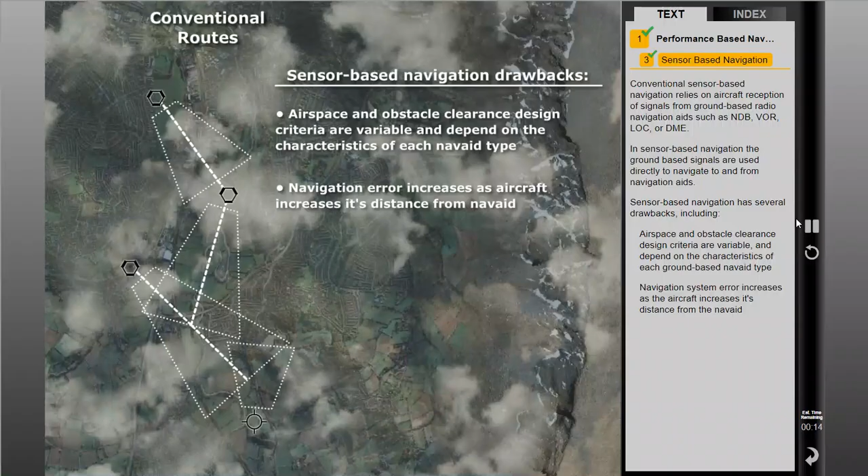Sensor-based navigation has several drawbacks, including: airspace and obstacle clearance design criteria are variable and depend on the characteristics of each ground-based nav aid type. Navigation system error increases as the aircraft increases its distance from the nav aid. And routes and approach tracks are restricted to straight-line designs and are constrained by large obstacle clearance allowances and the physical siting of the navigation aid or aids.

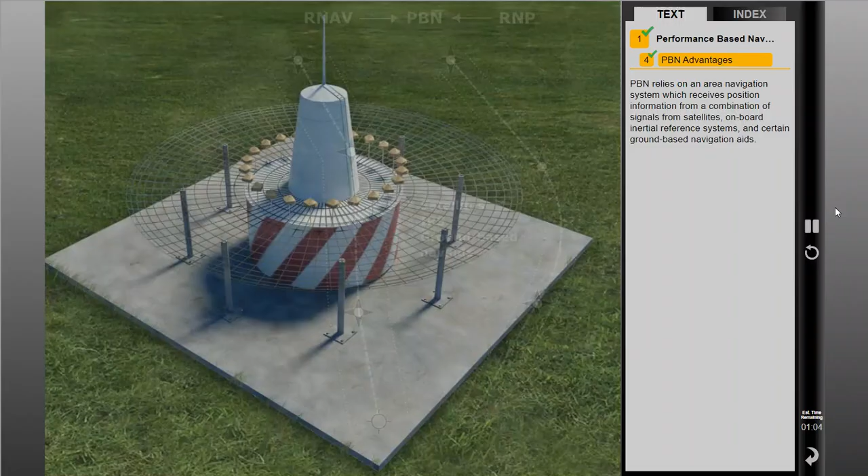PBN relies on an area navigation system, which receives position information from a combination of signals from satellites, onboard inertial reference systems, and certain ground-based navigation aids. In PBN, ground-based signals are not used for direct navigation purposes. Rather, they provide additional position information.

PBN has several advantages over conventional sensor-based navigation, including: airspace and obstacle clearance design criteria are made more consistent and independent of different or changing navigation technologies. Navigation system error is linear and does not change according to distance from a waypoint. Routes and approach tracks can include turning designs and are less constrained by obstacles due to smaller clearance allowances.

Navigation route design no longer needs to consider nav aid siting issues. And finally, the navigation function is performed by highly accurate and sophisticated onboard equipment, allowing a reduction in cockpit workload and an increase in safety.

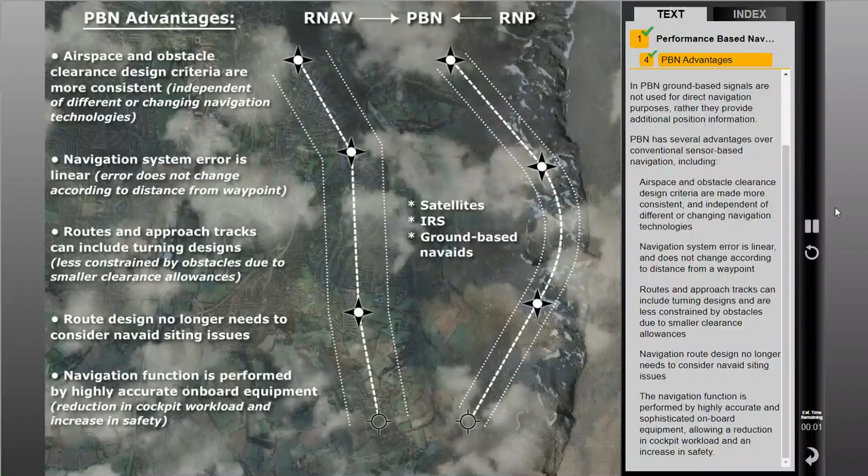The PBN concept relies on the use of an RNAV system. Two core inputs are required for the application of PBN: the nav aid infrastructure and the navigation specification. Applying these components in the context of routes and instrument procedures results in a third component: the navigation application. This topic will discuss the role of each of these components in the concept of PBN.

The concept of nav aid infrastructure refers to ground or space-based navigation aids. Ground-based navigation aids include NDB, VOR, and DME. Space-based nav aids include GNSS elements. As mentioned previously, PBN uses the two types of nav aids together for position fixing and navigation.

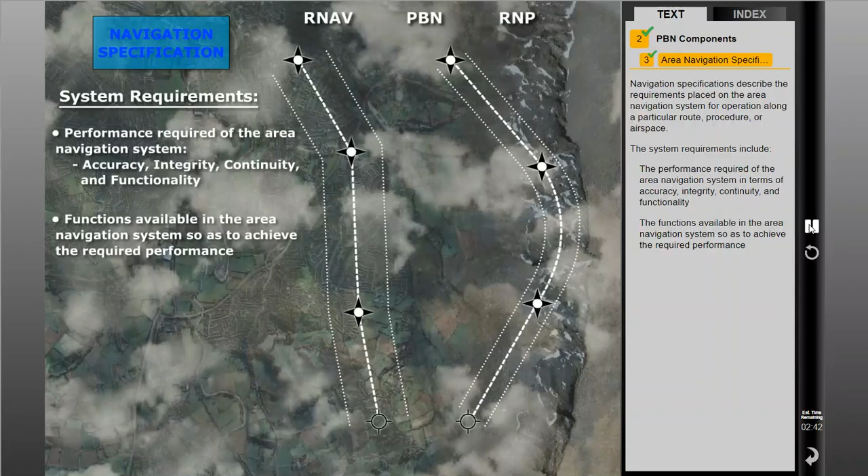Navigation specifications describe the requirements placed on the area navigation system for operation along a particular route, procedure, or airspace. The system requirements include the performance required of the area navigation system in terms of accuracy, integrity, continuity, and functionality, the functions available in the area navigation system so as to achieve the required performance, the navigation sensors integrated into the area navigation system that may be used to achieve the required performance, and flight crew and other procedures needed to achieve the performance mentioned of each navigation specification.

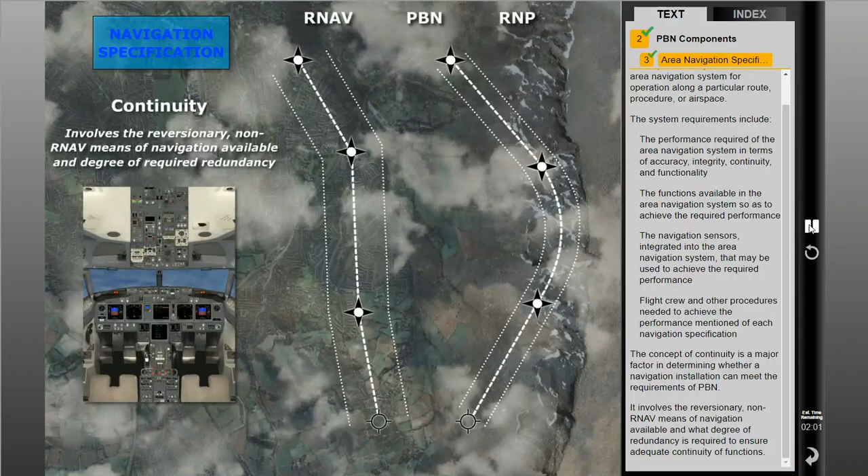The concept of continuity is a major factor in determining whether a navigation installation can meet the requirements of PBN. It involves the reversionary, non-RNAV means of navigation available, and what degree of redundancy is required to ensure adequate continuity of functions. Each navigation specification requires a level of continuity to be demonstrated by the navigation equipment prior to operation in RNAV RNP airspace routes.

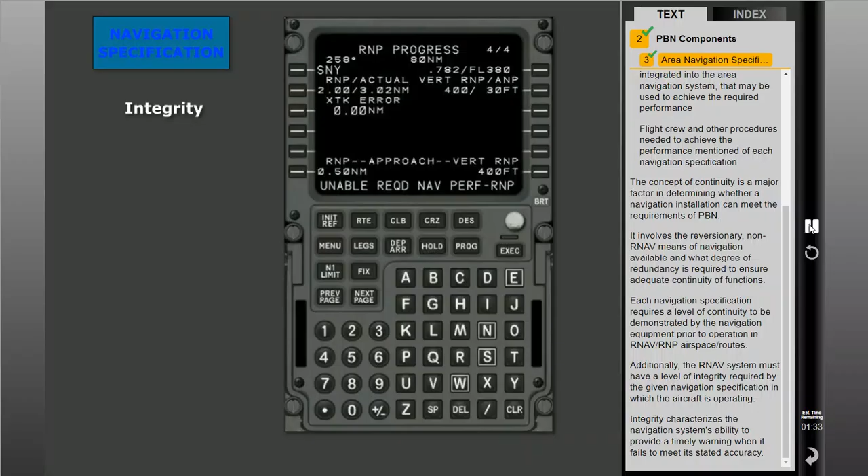Additionally, the RNAV system must have a level of integrity required by the given navigation specification in which the aircraft is operating. Integrity characterizes the navigation system's ability to provide a timely warning when it fails to meet its stated accuracy. The safety of the operation is also contingent upon the accuracy, resolution, and integrity of the data being used. The processes applied during data origination will ensure the accuracy of the data.

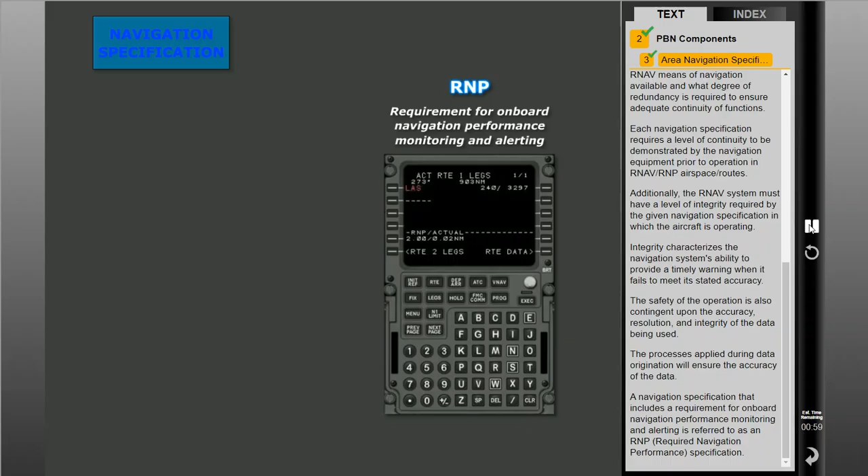A navigation specification that includes a requirement for onboard navigation performance monitoring and alerting is referred to as an RNP, or Required Navigation Performance Specification. A navigation specification that does not include a requirement for onboard navigation performance monitoring and alerting is referred to as an RNAV, or Area Navigation Specification.

For any particular PBN operation, it is possible that a sequence of RNAV and RNP applications is used. Be aware that compliance with one specification does not automatically imply compliance with another. More importantly, being compliant with a more stringent specification does not automatically imply compliance with a less stringent specification. Each RNAV and RNP specification will be discussed in detail later in the lesson.

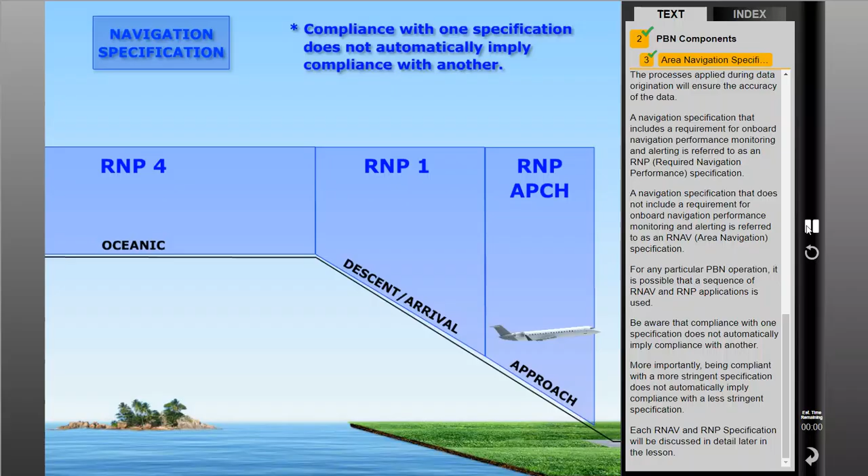The navigation application refers to utilizing the appropriate infrastructure and the specification required for the operation. Examples of how the navigation specification and the NavAid infrastructure may be used together in a navigation application include RNAV or RNP SIDs and STARs, RNAV or RNP ATS routes, and RNP approach procedures.

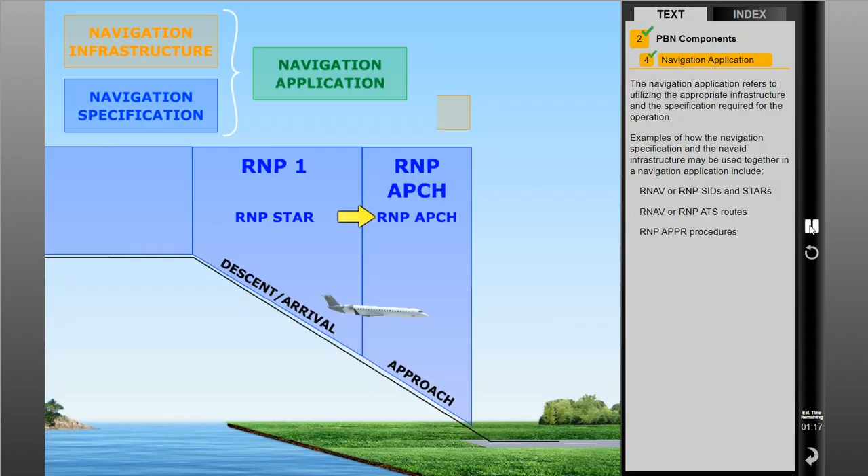RNAV systems range from single sensor-based systems to systems with multiple types of navigation sensors. The RNAV system typically integrates information from sensors such as air data, inertial reference, radio navigation, and satellite navigation, together with inputs from internal databases as well as crew-entered information.

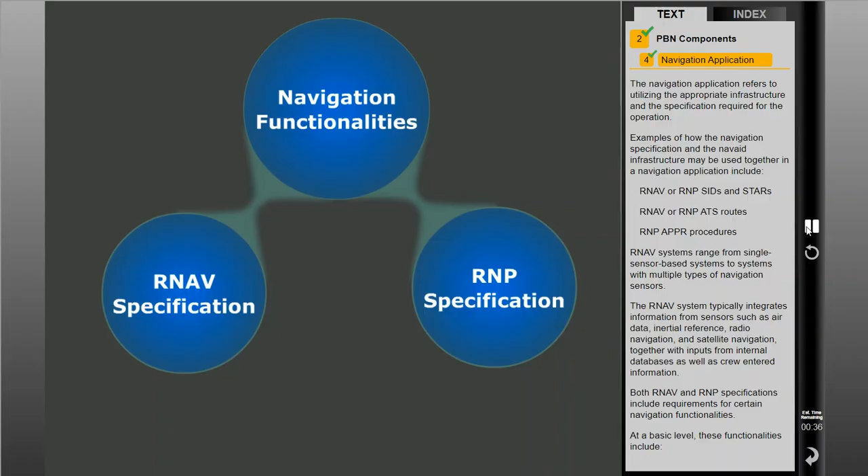Both RNAV and RNP specifications include requirements for certain navigation functionalities. At a basic level, these functionalities include continuous indication of aircraft position relative to track, to be displayed to the pilot flying on a navigation display situated in his or her primary field of view,

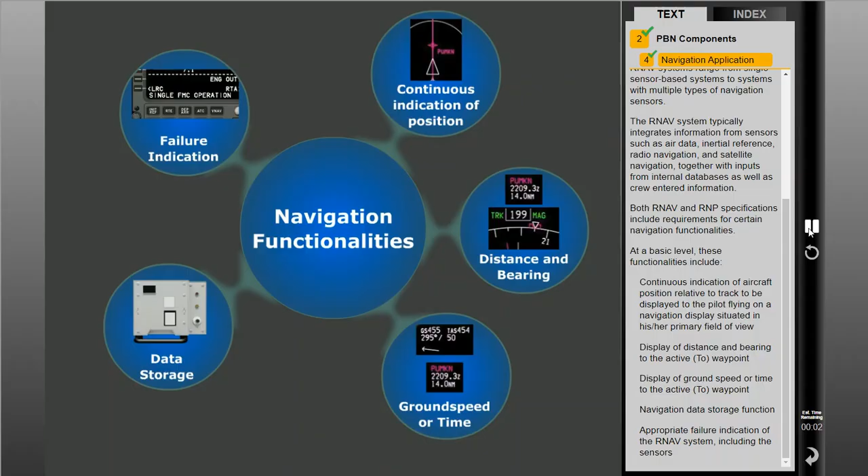display of distance and bearing to the active waypoint, display of ground speed or time to the active waypoint, navigation data storage function, and appropriate failure indication of the RNAV system, including the sensors. An RNP system is an RNAV system whose functionalities support onboard performance monitoring and alerting.

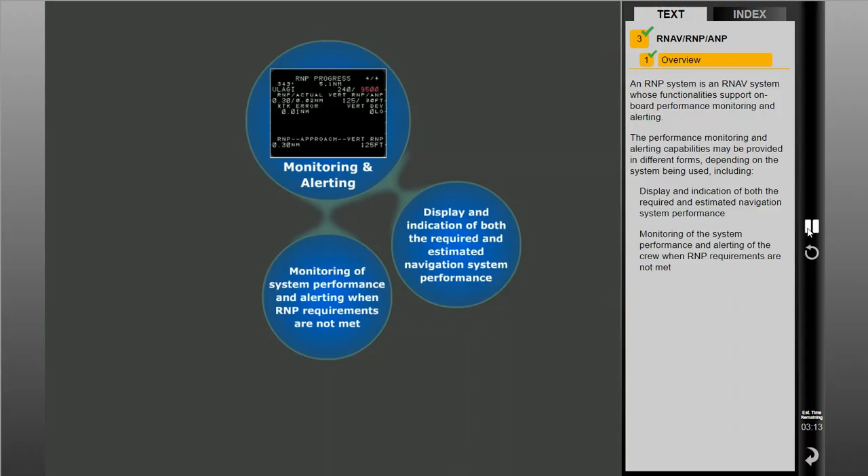The performance monitoring and alerting capabilities may be provided in different forms depending on the system being used, including display and indication of both the required and estimated navigation system performance, monitoring of the system performance and alerting of the crew when RNP requirements are not met, and cross-track deviation displays scaled to RNP in conjunction with separate monitoring and alerting for navigation integrity.

The airworthiness approval process assures that each item of the required area navigation equipment installed is of a type and design appropriate to the operation. Additionally, operators need to ensure the required installations will function properly under foreseeable operating conditions.

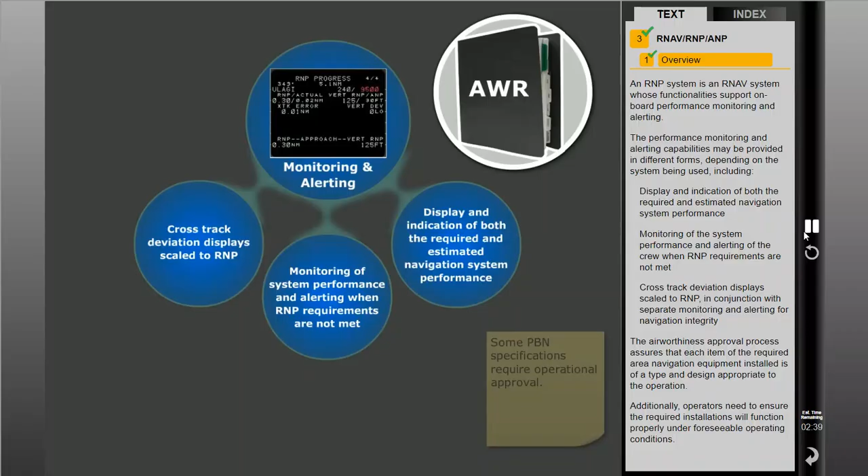An RNP or RNAV specification is a statement of the navigation performance or accuracy required to conduct specific flight procedures or for operations in specific airspace regions. In oceanic, remote, en route, and terminal phases of flight, PBN is limited to operations with lateral performance requirements and time constraints. During the approach phase of flight, PBN accommodates both linear and vertical operations.

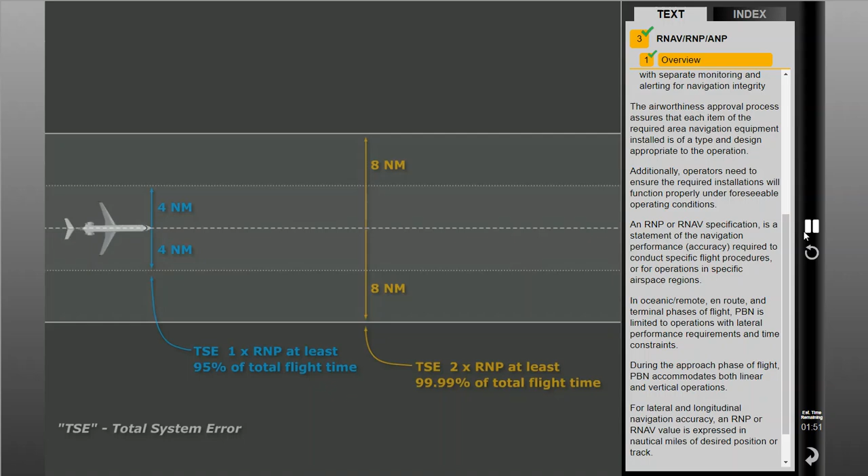For lateral and longitudinal navigation accuracy, an RNP or RNAV value is expressed in nautical miles of desired position or track. Actual navigation performance, or ANP, is a measure by the FMC of its position accuracy.

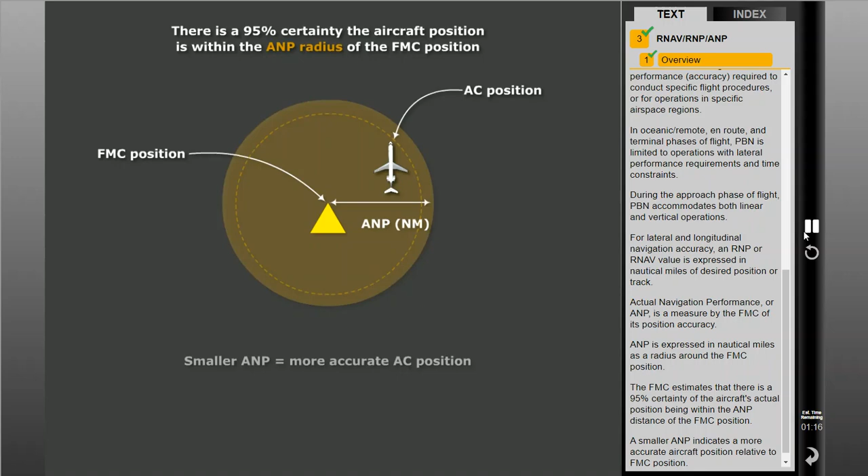ANP is expressed in nautical miles as a radius around the FMC position. The FMC estimates that there is a 95% certainty of the aircraft's actual position being within the ANP distance of the FMC position. A smaller ANP indicates a more accurate aircraft position relative to FMC position. A larger ANP indicates a possibly less accurate aircraft position relative to FMC position.

ANP is normally a low value, but may increase if degradation of satellite or ground-based signals occurs, or if equipment failures occur on board.

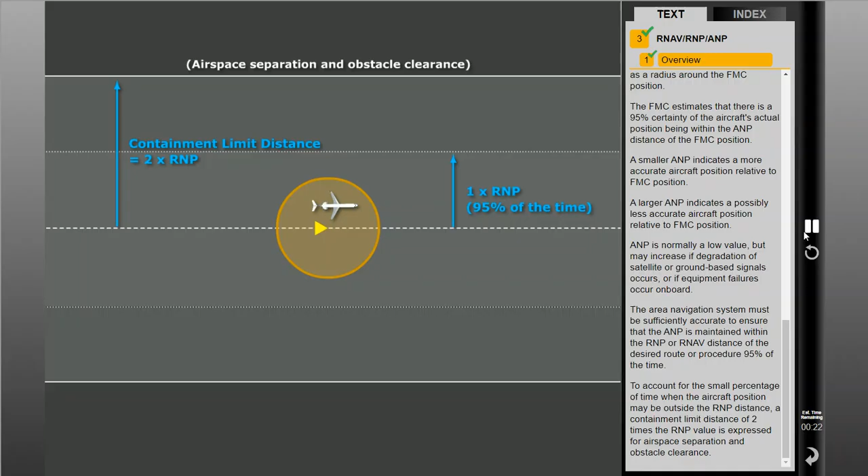The area navigation system must be sufficiently accurate to ensure that the ANP is maintained within the RNP or RNAV distance of the desired route or procedure 95% of the time. To account for the small percentage of time when the aircraft position may be outside the RNP distance, a containment limit distance of 2 times the RNP value is expressed for airspace separation and obstacle clearance.

The RNAV system must be sufficiently accurate to ensure that the aircraft's actual position is maintained within the containment limit distance of the FMC calculated position 99.99% of the time.

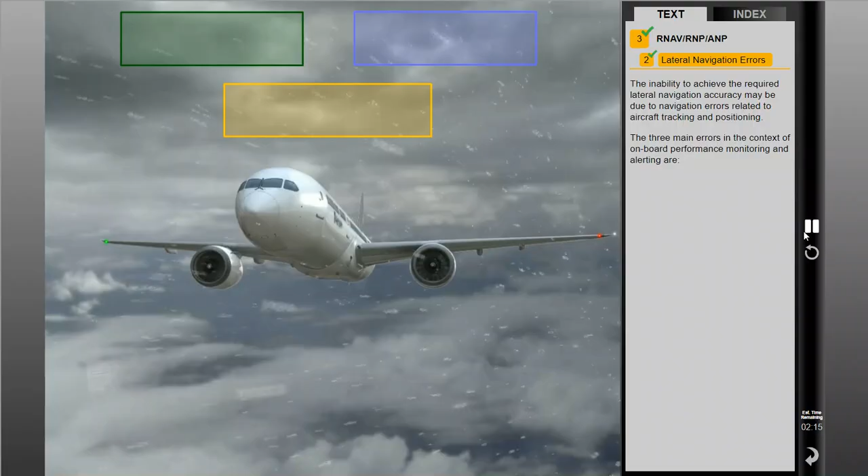The inability to achieve the required lateral navigation accuracy may be due to navigation errors related to aircraft tracking and positioning. The 3 main errors in the context of onboard performance monitoring and alerting are path definition error, or PDE, flight technical error, or FTE, or navigation system error, or NSE.

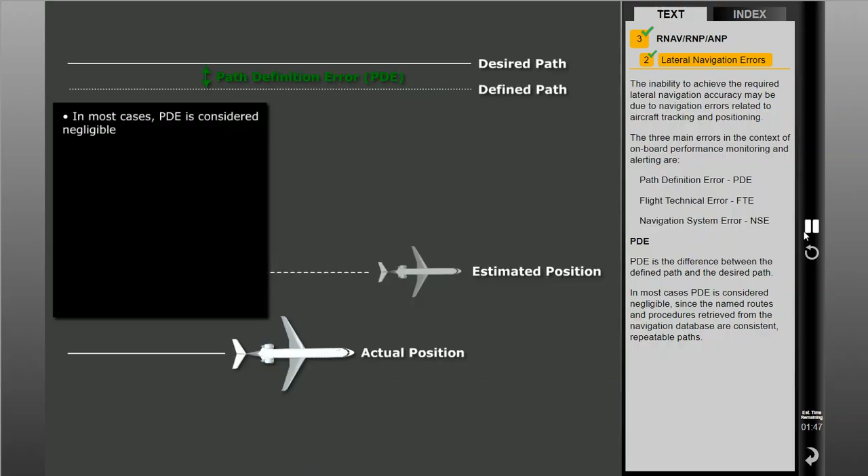PDE is the difference between the defined path and the desired path. In most cases, PDE is considered negligible, since the named routes and procedures retrieved from the navigation database are consistent, repeatable paths.

A consistent, repeatable path cannot be defined for a turn that allows for a flyby turn at a waypoint, a flyover waypoint, or occurs when the aircraft reaches a target altitude. For these, a variability of route will be expected. Onboard performance monitoring and alerting of PDE are managed by gross reasonableness checks of navigation data.

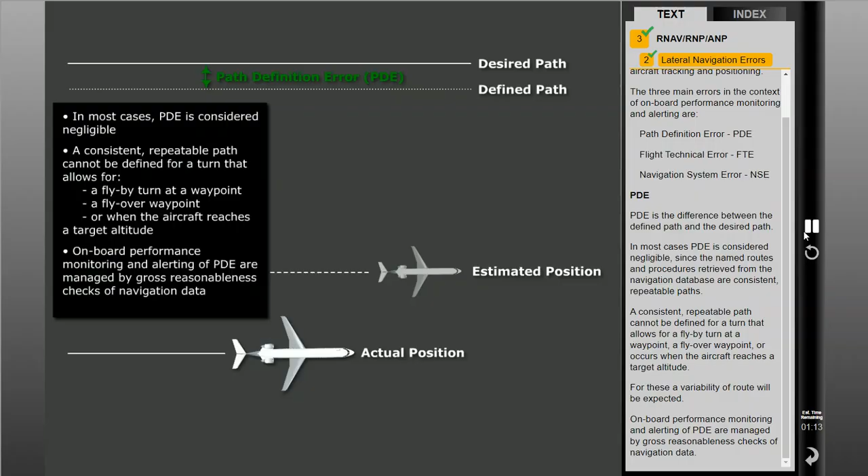FTE refers to the pilot or autopilot's ability to follow the defined path or track. FTE can be monitored by the autopilot or with crew procedures, for example, with a moving map display.

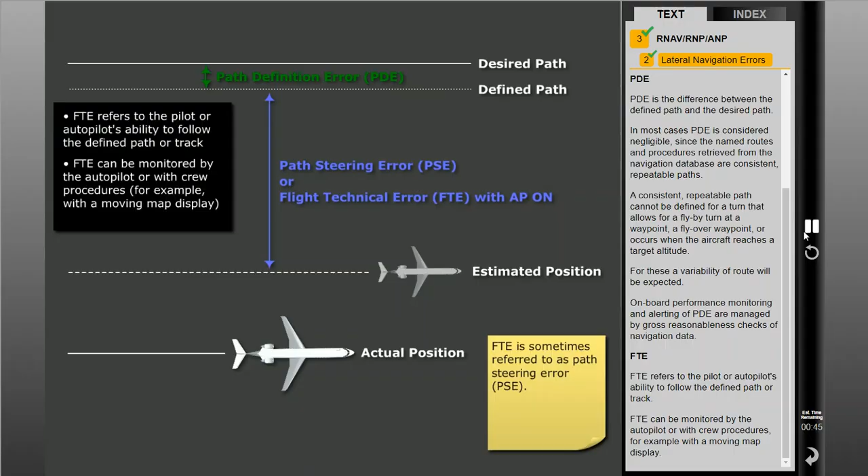NSE is defined as the difference between the aircraft's estimated position and actual position. Total system error, or TSE, is the total of the errors combined mathematically, not simply added together. The TSE must remain equal to or less than the required accuracy for 95% of the total flight time.

Abnormal and contingency procedures are to be used in case of loss of the PBN capability. These procedures will depend on the RNAV system installed and the specification of operation.

PBN is based on the ability to assure reliable, repeatable, and predictable flight paths for improved capacity and efficiency. This requires not only the functions traditionally provided by the RNAV system, but may also require specific functions to improve procedures and airspace and air traffic operations.

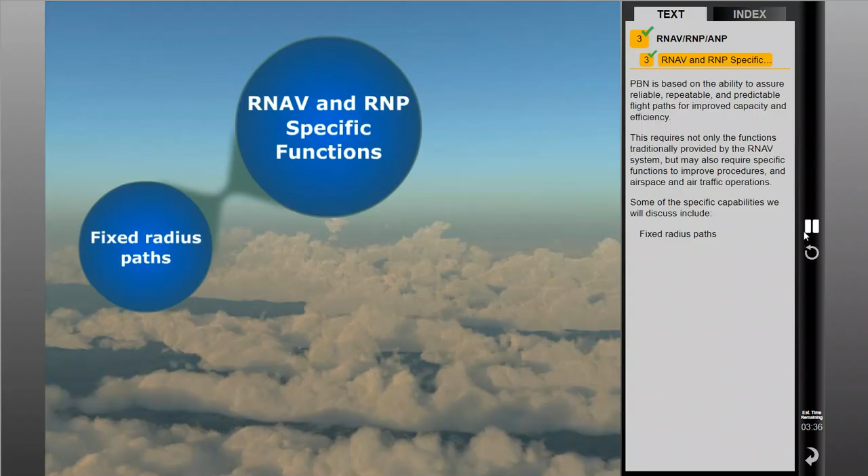Some of the specific capabilities we will discuss include fixed radius paths, RNAV or RNP holding, and lateral offsets. The fixed radius path, or FRP, can be one of two types: radius to fix, or RF, leg type, or fixed radius turn, or FRT.

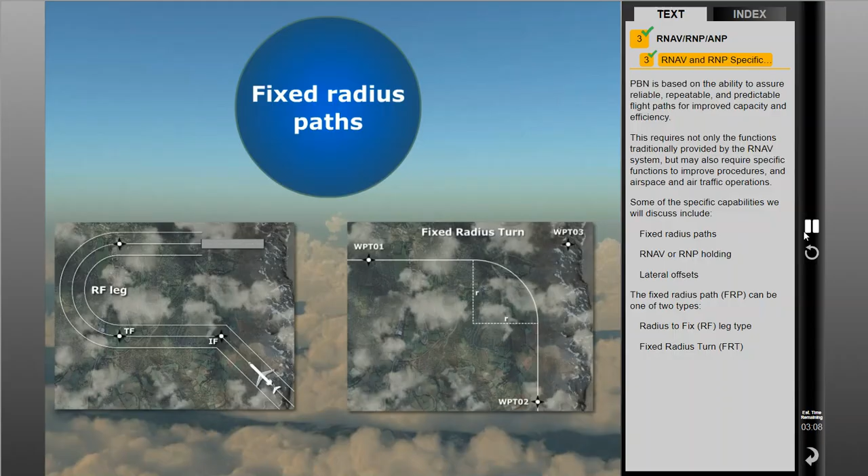The RF leg should be used when there is a requirement for a specific curved path radius in a terminal or approach procedure. The RF leg is defined by a radius, arc length, and fix.

RNP systems supporting this type of turn provide the same ability to conform to the track-keeping accuracy in the turn as in the straight line.

The FRT is intended to be used with en route procedures. Due to how the procedure data is defined, the RNP system creates the fixed radius turn. There are two possible radii associated with this type of turn.

22.5 nautical miles for high altitudes above flight level 195, and 15 nautical miles for low altitudes. This enables improvement in airspace usage through closely spaced parallel routes.

During a flyby turn, the RNAV system uses the aircraft's speed, bank angle, wind, and track angle change to calculate a flight path to smoothly transition from one segment to the next.

Considering wind changes and differing aircraft performance, the turn initiation point and turn area can vary. Flyby turns are an integral component of an RNAV flight path.

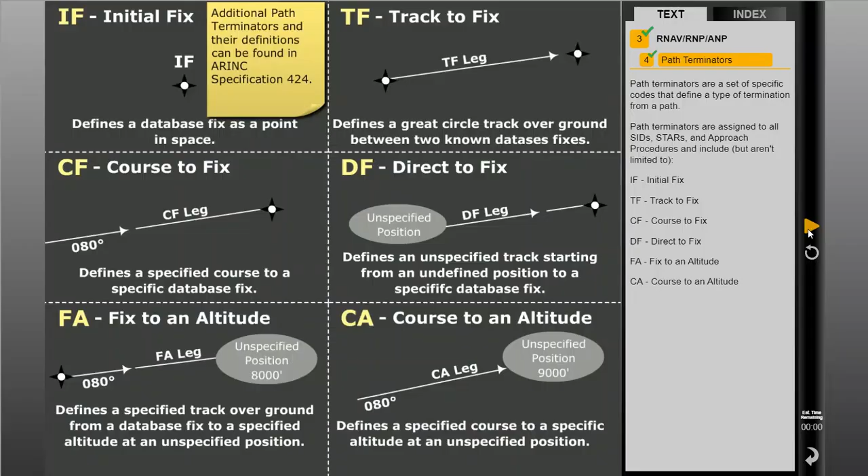We will now discuss the details, requirements, and procedures for each RNAV and RNP specification. Some requirements are common to all specifications and are included in this section.

Commercial operators must have a training program addressing operational practices, normal and contingency procedures, and specific items related to the specification.

In order for operators to get approval for RNAV RNP operations, they must prove their aircraft are properly equipped with the appropriate navigation system.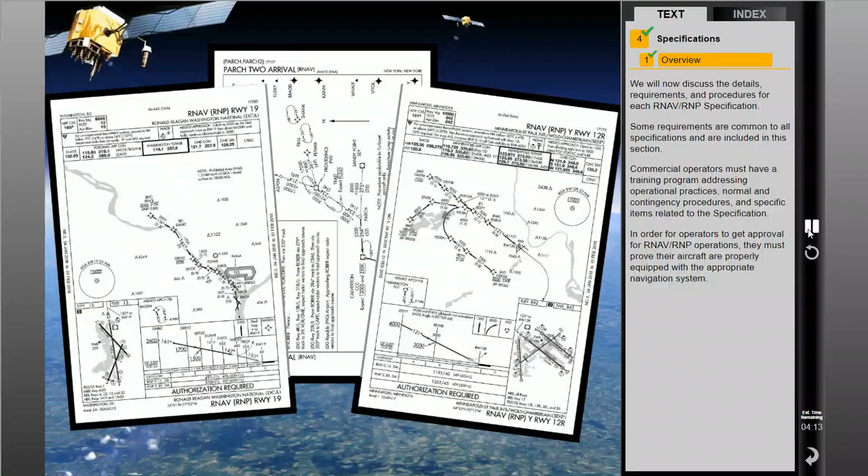Additionally, some specifications define the instrument display requirements, such as being visible to the pilot in their primary field of view and the navigation map having lateral deviation functionality.

This lesson will not discuss all the specifics required. Rather, the crew operations required for each specification.

Operators and pilots intending to conduct operations in RNAV or RNP airspace need to use the appropriate ICAO flight plan designation. For RNAV, this means filing with the appropriate flight plan suffix indicating approval for operation on the route.

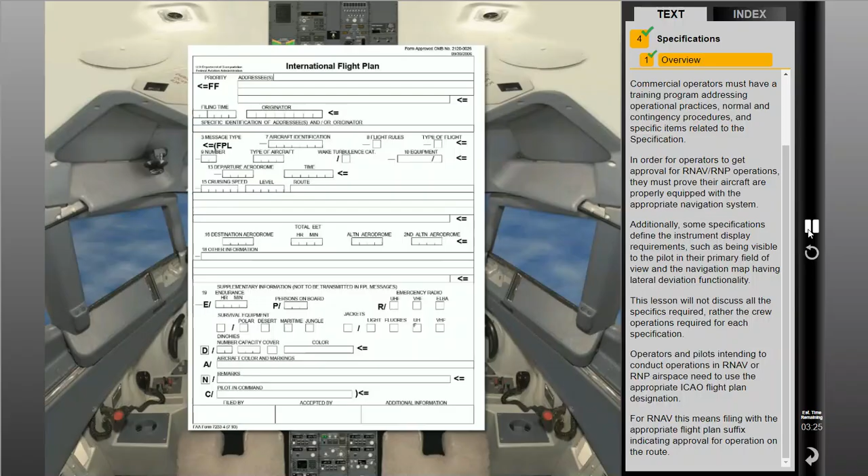For RNP operation, the letter R should be placed in Block 10 of the ICAO flight plan to indicate the pilot has reviewed the planned route of flight and determined the RNP requirements and the aircraft and operator approval. The accuracy capability should be placed in the remarks section.

Pilots must review aircraft maintenance logs to ensure proper operation of equipment required for the RNAV or RNP accuracy. If an MEL is utilized, ensure the inoperative equipment allows for RNAV or RNP dispatch.

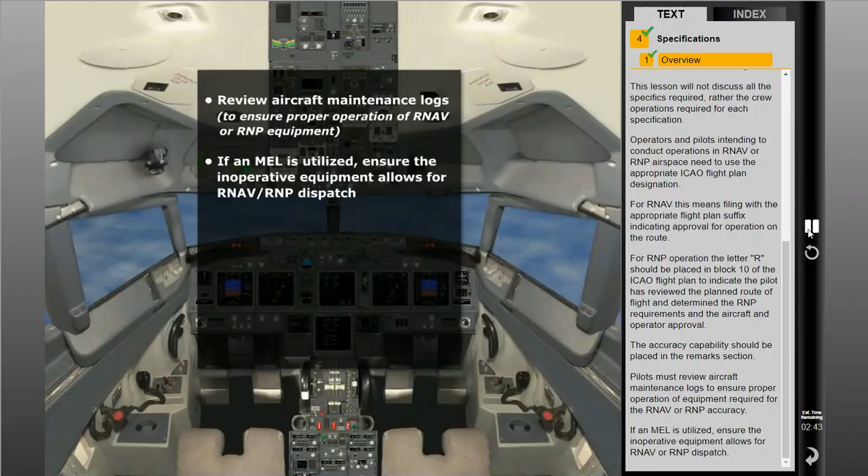Additionally, pilots need to ensure onboard navigation data is current and includes the appropriate procedures required of the operation. The database must be valid for the current Aeronautical Information Regulation and Control Cycle, unless otherwise specified in operations documents or AMC.

For any operation utilizing GNSS, operators are required to ensure appropriate RAIM is available for the operation. Navigation equipment failure contingencies appropriate to the operations being conducted will have been approved and trained in the pilot's training program.

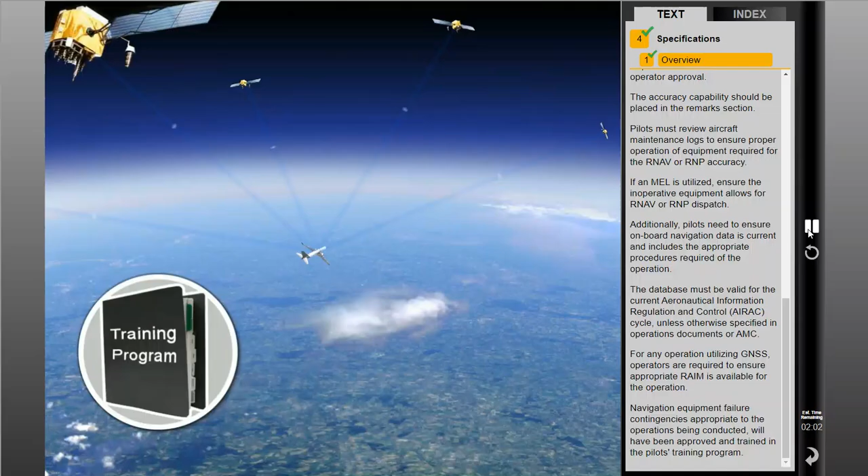Should any failure occur, the pilot should revert to this training as appropriate. Additionally, the pilot must notify ATC of any loss of RNP RNAV capability and their intentions.

All pilots are expected to maintain route centerlines during all RNAV operations, unless authorized by ATC or in an emergency. For normal operations, cross-track error deviation is limited to plus or minus half the required accuracy of the route.

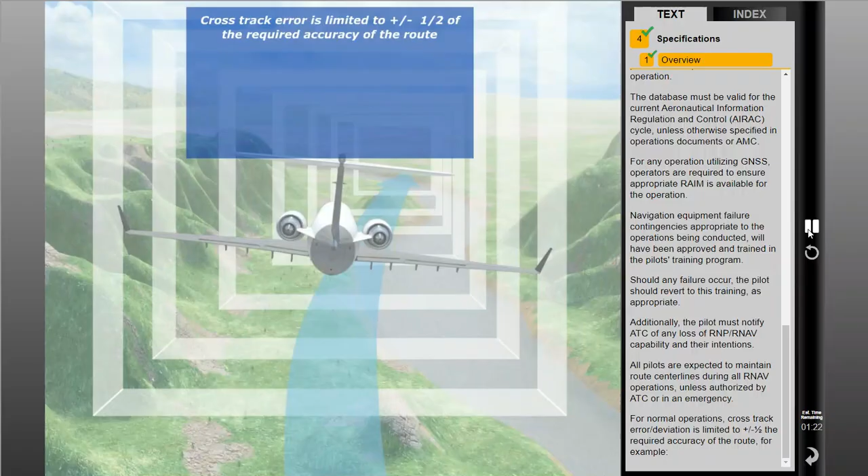For example, 0.5 nautical mile for RNAV1, 0.5 nautical mile for RNP1, 1 nautical mile for RNAV2, 2 nautical miles for RNP4. Brief deviations from this are allowable during and immediately after procedure or route turns. The deviation must not exceed 1 times the navigation accuracy, 1.0 nautical miles for RNAV1, 2.0 nautical miles for RNAV2, and so on.

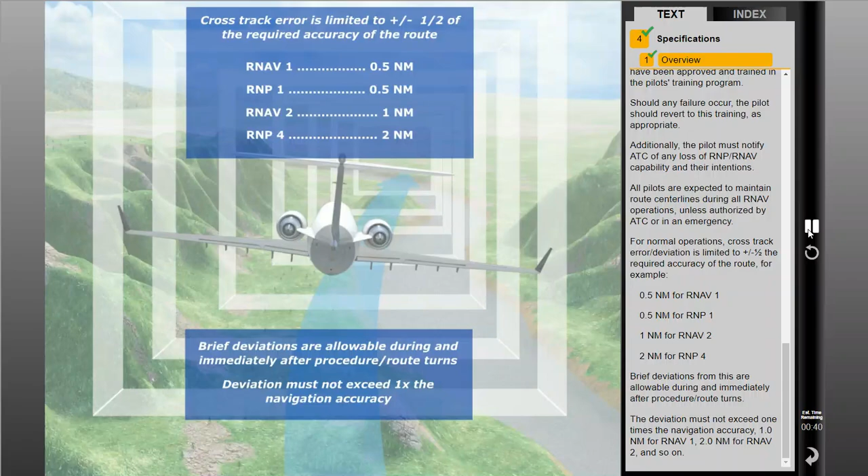RNP values may be changed automatically by the FMC to certain default values, or may be set manually by the crew when required by procedures. Typical RNP settings for flight operations are: oceanic airspace, RNP 10 or 4; continental en route, RNP 2; terminal airspace, RNP 1; approach and departure, RNP 1; RNP approaches, RNP 0.1 to 0.3.

RNAV 10 has been designated for operations in oceanic and remote areas. Though the designation of the airworthiness and operational approval, as well as airspace and route designation, is RNP 10, it will be referred to as RNAV 10. This is to keep consistency with the differentiation of RNP requiring monitoring and alerting, and RNAV not having this requirement.

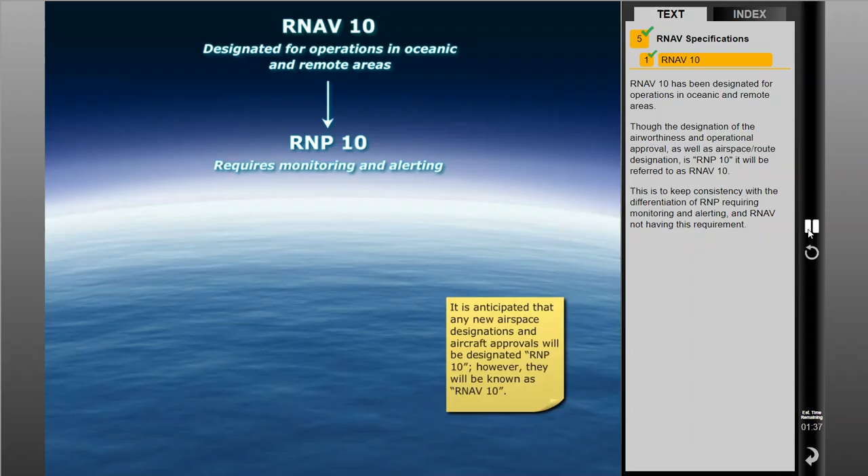The lateral TSE for RNAV 10 must be within plus or minus 10 nautical miles for at least 95% of the total flight time. The along track error must also be within plus or minus 10 nautical miles for at least 95% of the total flight time. Additionally, RNAV 10 supports 50 nautical mile lateral and 50 nautical mile longitudinal distance-based separation minima.

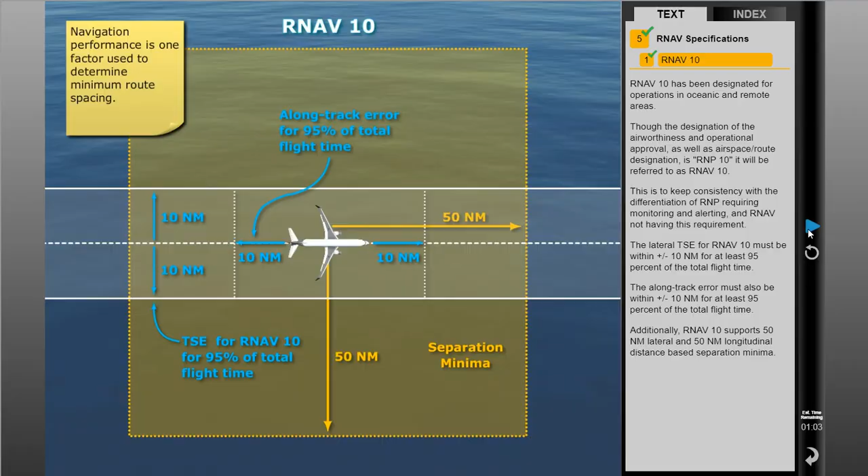RNAV 10 requires that the aircraft operating in oceanic and remote areas be equipped with at least 2 independent and serviceable long-range navigation systems, or LRNSs, comprising an INS, an IRS FMS, or a GNSS. For aircraft utilizing dual INS or dual IRU systems, RNAV 10 operations have a time limit of 6.2 hours of flight time. The timing starts when the systems are placed in navigation mode or at the last point at which the systems are updated.

Aircraft equipped with a single INS or IRU and GNSS do not have these time limitations. Prior to entering oceanic airspace, the position of the aircraft must be checked as accurately as possible by using external nav aids. This may require DME/DME and/or VOR checks to determine navigation system errors through displayed and actual positions. Cross-checking procedures must be used in flight to identify navigation errors in sufficient time to prevent aircraft deviation from cleared routes. Any deterioration or failure of the navigation equipment below that required, or deviation due to a contingency procedure, must be reported to ATC.

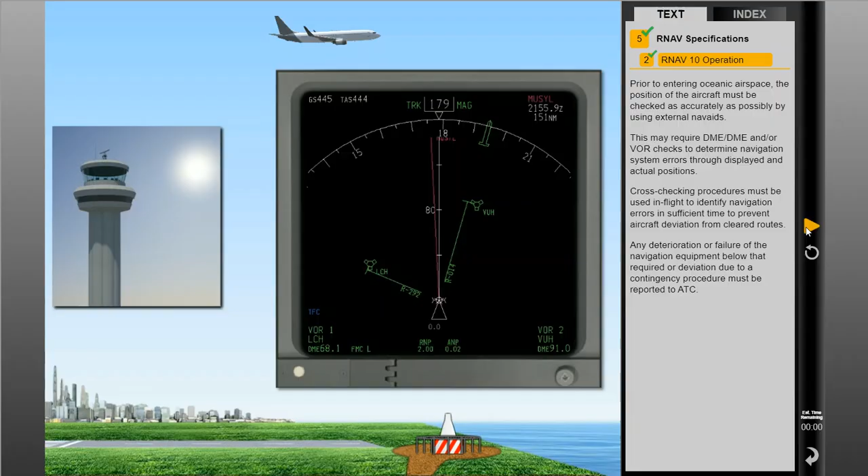RNAV 5 operations are typically conducted en route and on arrivals. During operations in RNAV 5 airspace or routes, the lateral TSE must be within 5 nautical miles for at least 95% of the total flight time. RNAV 5 operations are based on the use of RNAV equipment that utilize inputs from one or more of the following to determine the aircraft position along with a means to establish and follow the desired path: VOR DME, DME/DME, INS or IRS, and GNSS.

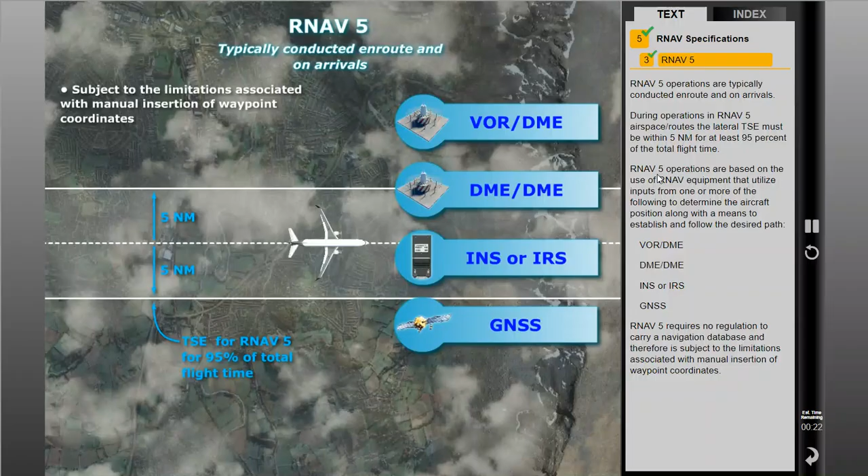RNAV 5 requires no regulation to carry a navigation database, and therefore is subject to the limitations associated with manual insertion of waypoint coordinates. Additionally, since the specification does not require the aircraft to be installed with dual RNAV systems, an alternate navigation source must be operable in the event of loss of RNAV capability.

Generally, RNAV 2 is used en route, while RNAV 1 is used for terminal phases of flight, including arrivals and departures. During RNAV 1 operations, the lateral TSE must be within plus or minus 1 nautical mile for at least 95% of the total flight time. Additionally, the along track error must be within plus or minus 1 nautical mile for at least 95% of the time.

Similarly, during RNAV 2 operations, the lateral and along track error must be within plus or minus 2 nautical miles for at least 95% of the time.

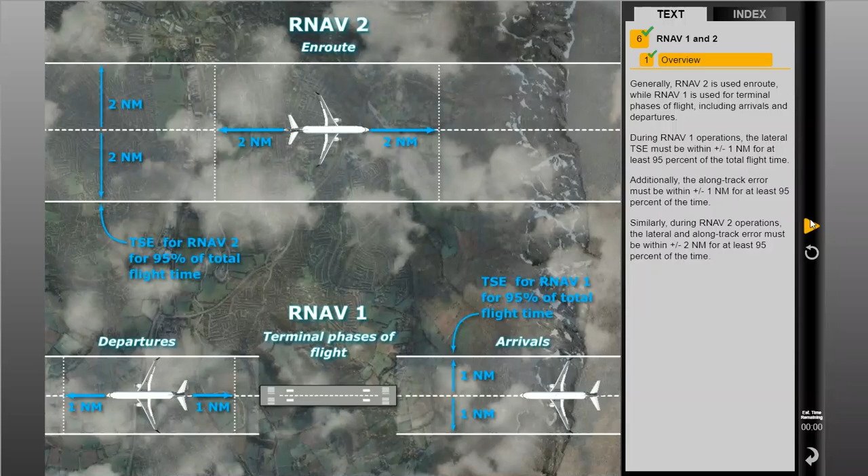Pilots must not fly an RNAV SID or STAR unless it is retrievable by name from the onboard database. The pilot should confirm the routing conforms to that of the charted route. Once loaded by name, the SID or STAR may be subsequently modified by the entry or deletion of specific waypoints in response to ATC clearances. The manual entry or creation of new waypoints by latitude and longitude values is not permitted. Additionally, pilots may not change any RNAV SID or STAR database waypoint from a flyover to a flyby and vice versa.

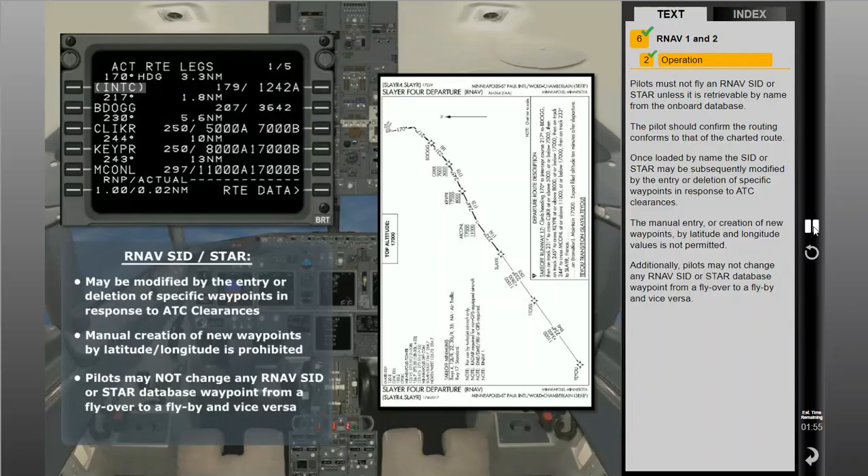Although not recommended, routes can be built using named fixes or waypoints from the database, as long as all fixes along the published route to be flown are inserted. The route may be subsequently modified by the insertion and deletion of named waypoints in response to ATC clearances. As with SIDs and STARs, the creation of waypoints by manual entry of latitude and longitude values is prohibited.

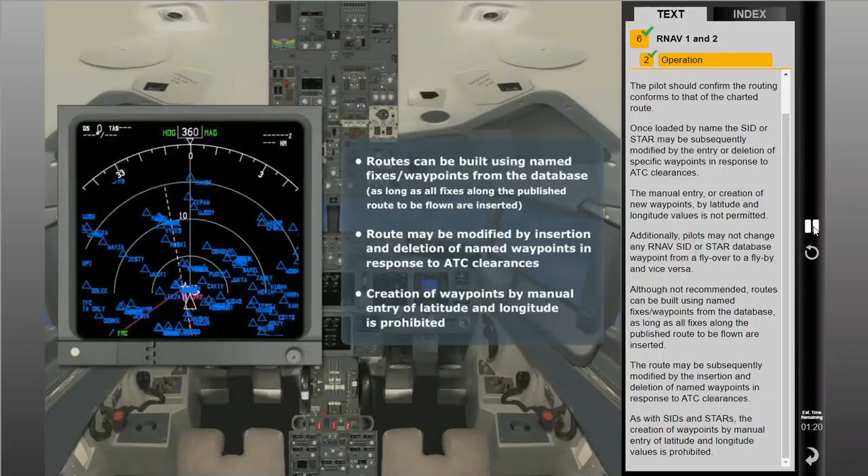To use an RNAV SID, the pilot must be able to use RNAV to follow lateral flight guidance no later than 153 meters or 500 feet above airport elevation, though published RNAV guidance on a given route may begin higher. For aircraft using GNSS, the signal must be acquired before the takeoff roll commences.

Pilots must use an authorized method to achieve an appropriate level of performance for RNAV 1, which includes lateral deviation indicator, navigation map display, flight director, and/or autopilot.

Route modifications in the terminal area may take the form of radar headings and direct-to clearances, which must be complied with. Insertion of waypoints loaded by name from the database may be required and is acceptable. To reiterate, manual entry or modification of the route using waypoints not in the database is not permitted.

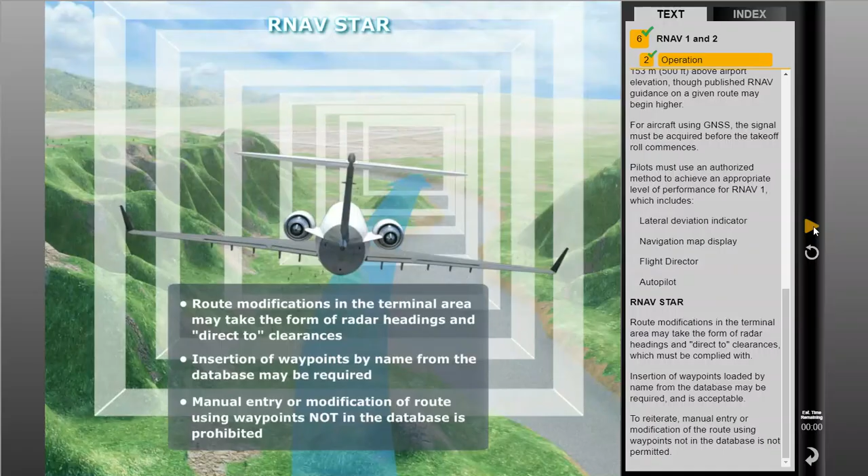We will now discuss RNP specification details. RNP 4 is designed for operations in oceanic and remote airspace, therefore has no requirement for ground-based nav aids.

During RNP 4 operations, the lateral TSE must be within plus or minus 4 nautical miles for at least 95% of the flight time. The along track TSE must also be within plus or minus 4 nautical miles for at least 95% of the flight time. The flight technical error should not exceed 2.0 nautical miles to satisfy the 95% accuracy requirement.

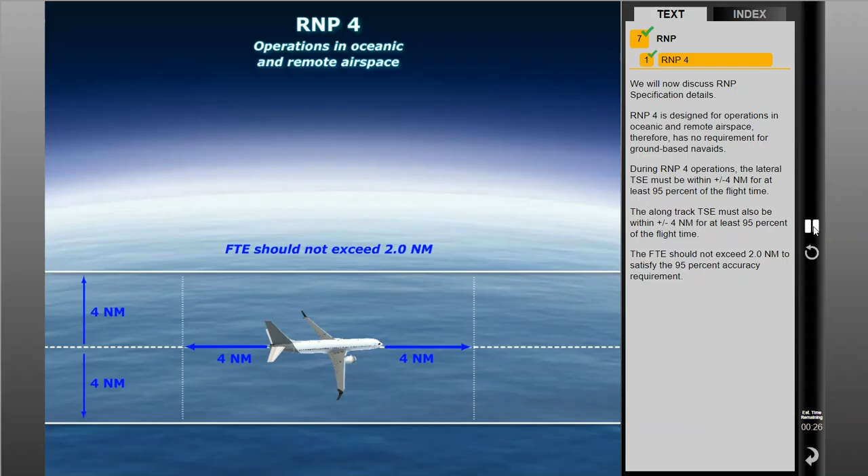GNSS is the primary means of navigation for RNP-4, either as a standalone navigation system or as part of a multi-sensor system. For RNP-4 oceanic or remote airspace operations, at least 2 serviceable independent LRNSs must be installed and operable.

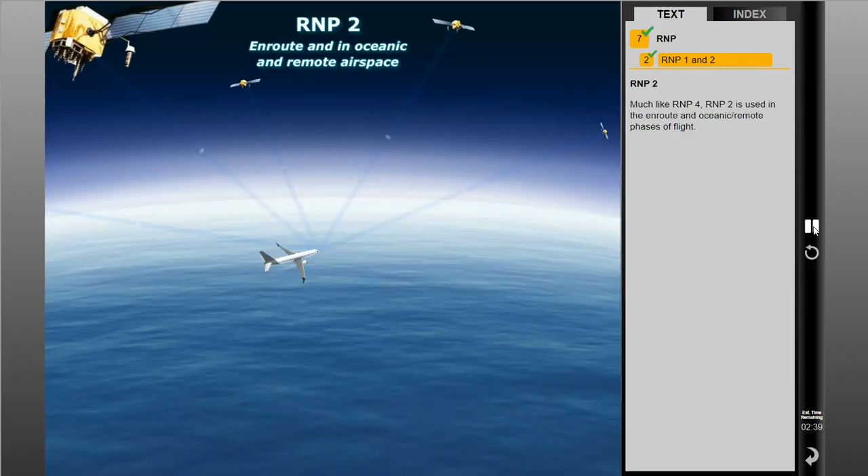Much like RNP-4, RNP-2 is used in the en route and oceanic or remote phases of flight. Also like RNP-4, GNSS is the primary means of navigation for RNP-2, either as a standalone navigation system or as part of a multi-sensor system. For RNP-2 oceanic or remote airspace operations, at least 2 serviceable independent LRNSs must be installed and operable.

During operations in airspace or on routes designated as RNP-2, the lateral TSE must be within plus or minus 2 nautical miles for at least 95% of the total flight time. The along track error must also be within plus or minus 2 nautical miles for at least 95% of the total flight time. To satisfy the 95% accuracy requirement, the flight technical error should not exceed 1 nautical mile.

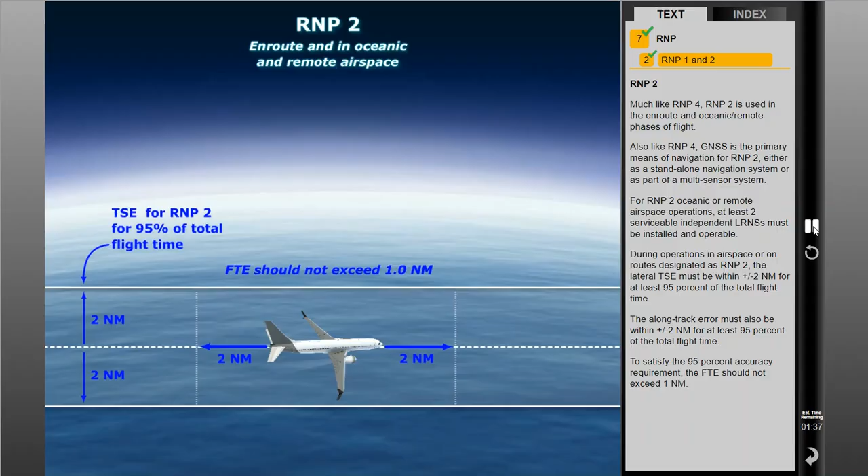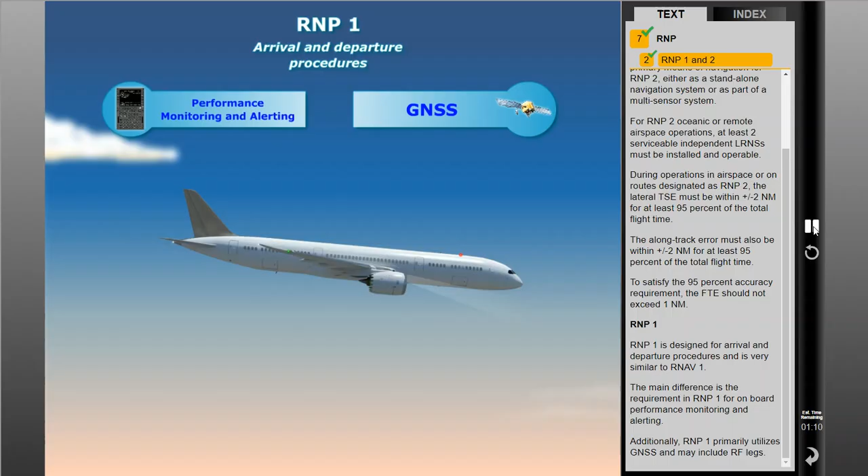RNP-1 is designed for arrival and departure procedures and is very similar to RNAV-1. The main difference is the requirement in RNP-1 for onboard performance monitoring and alerting. Additionally, RNP-1 primarily utilizes GNSS and may include RF legs.

Pilots must not fly an RNP SID or STAR unless it is retrievable by name from the onboard database. Once loaded by name, the SID or STAR may be subsequently modified by the entry or deletion of specific waypoints in response to ATC clearances. The manual entry or creation of new waypoints by latitude and longitude values is prohibited.

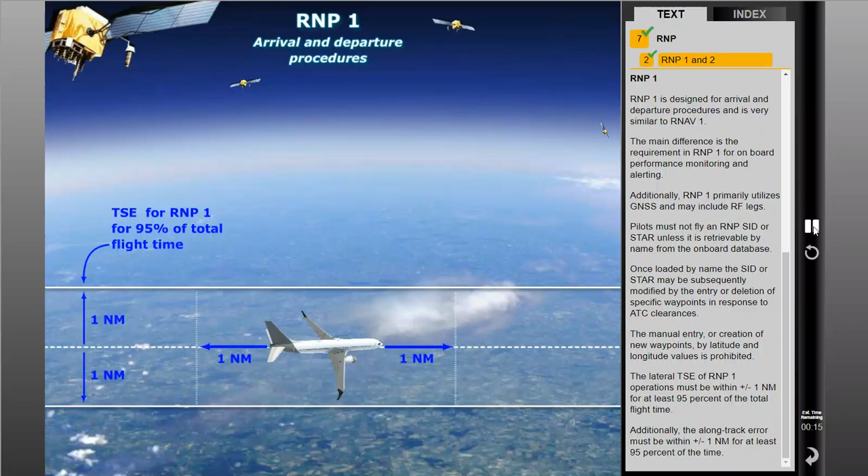The lateral TSE of RNP-1 operations must be within plus or minus 1 nautical mile for at least 95% of the total flight time. Additionally, the along track error must be within plus or minus 1 nautical mile for at least 95% of the time. To satisfy the accuracy requirement, the FTE should not exceed 0.5 nautical mile for autopilot or flight director, or 0.8 nautical mile for manual control.

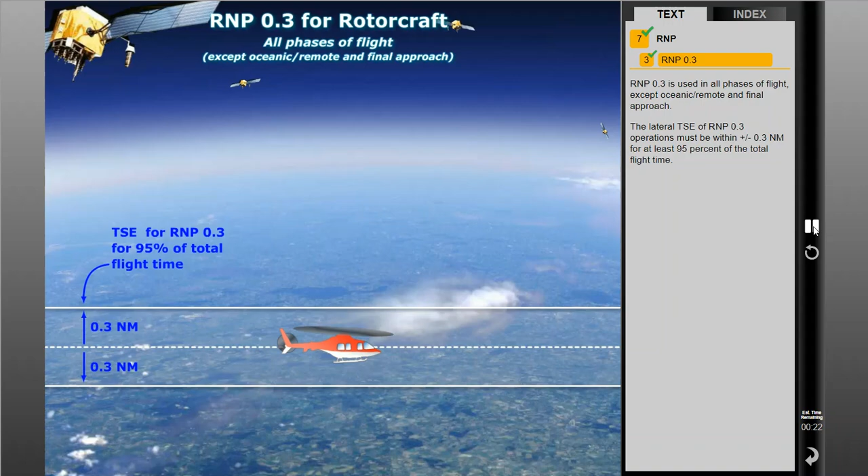RNP 0.3 is used in all phases of flight except oceanic remote and final approach. The lateral TSE of RNP 0.3 operations must be within plus or minus 0.3 nautical mile for at least 95% of the total flight time. Additionally, the along track error must be within plus or minus 0.3 nautical mile for at least 95% of the time. This specification is for use by helicopters.

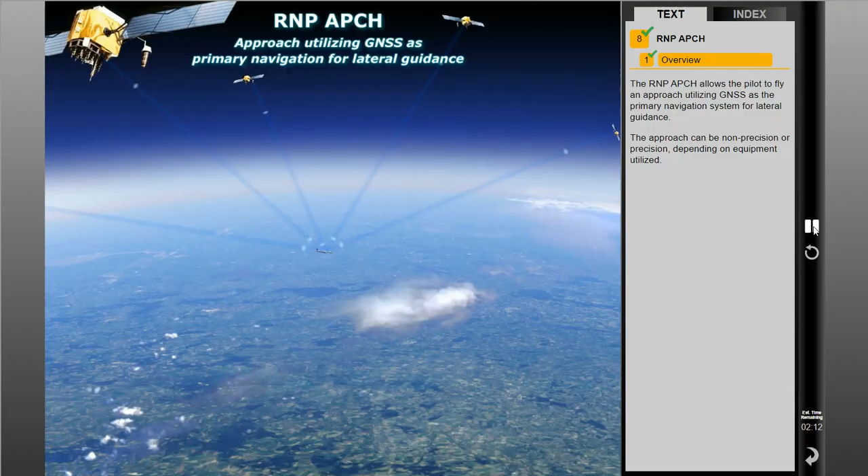The RNP approach allows the pilot to fly an approach utilizing GNSS as the primary navigation system for lateral guidance. The approach can be non-precision or precision, depending on equipment utilized. In flying the approach without vertical guidance, it is flown to an LNAV MDA as stated on the published instrument approach procedure.

The RNP approach may only be utilized if it is loaded by procedure name from the onboard navigation database. The pilots must ensure the route conforms to the charted procedure prior to the initial approach fix. The missed approach segment may be based on conventional nav aids, VOR, DME, etc., or GNSS-based. During the pre-flight, the pilot should ensure sufficient means are available to land at the destination or alternate should there be a loss of RNP approach airborne capability.

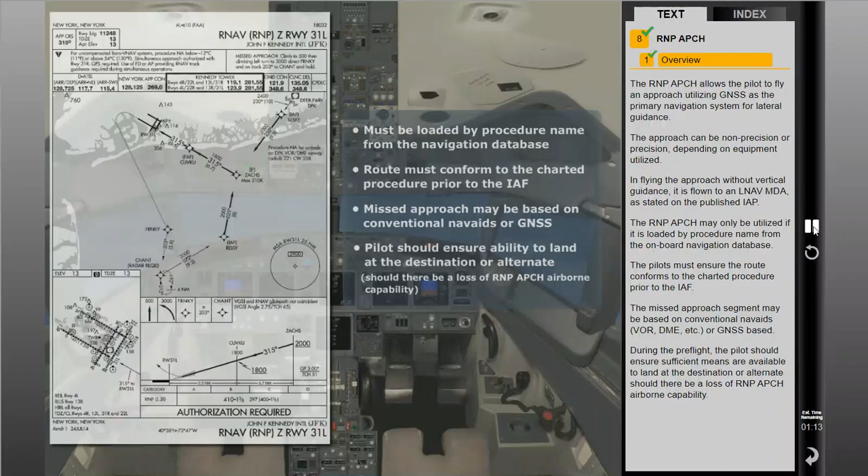In flying the RNP approach, during operations on the initial and intermediate segments and for an RNAV missed approach, the lateral TSE must be within plus or minus 1 nautical mile for at least 95% of the total flight time. Additionally, the along track error must also be within plus or minus 1 nautical mile for at least 95% of the total flight time.

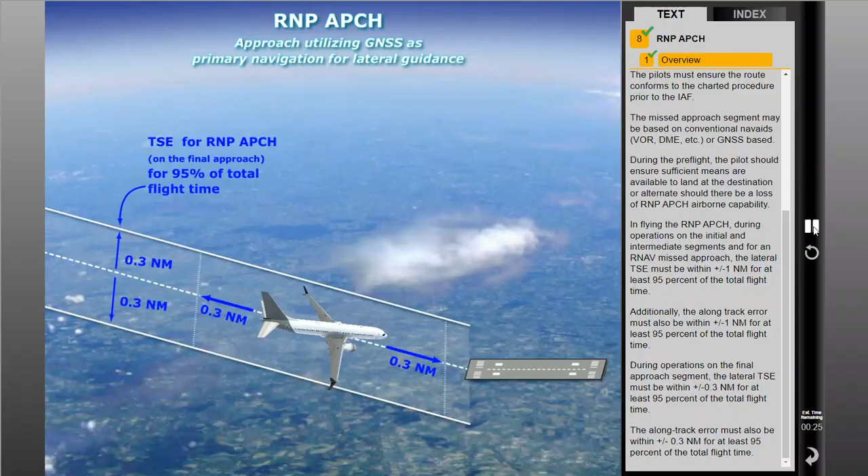During operations on the final approach segment, the lateral TSE must be within plus or minus 0.3 nautical mile for at least 95% of the total flight time. The along track error must also be within plus or minus 0.3 nautical mile for at least 95% of the total flight time. The 95% FTE should not exceed 0.5 nautical mile on the initial and intermediate segments and an RNAV missed approach. The 95% FTE should not exceed 0.15 nautical mile on the final approach segment.

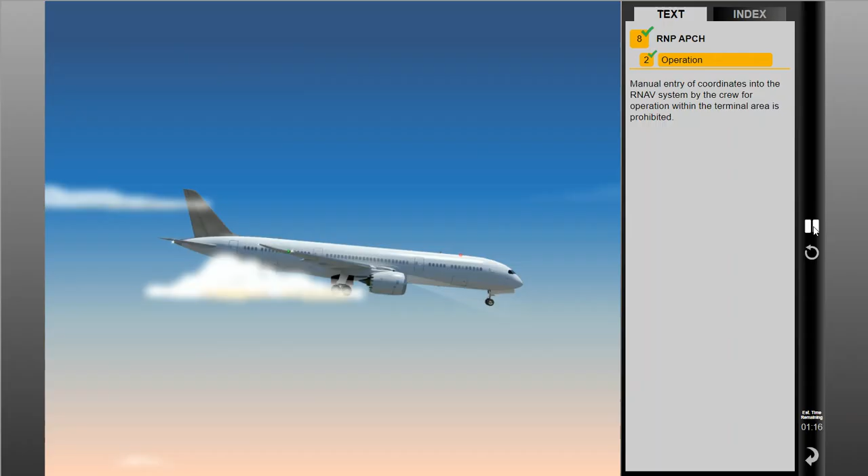Manual entry of coordinates into the RNAV system by the crew for operation within the terminal area is prohibited. Direct to clearances may be accepted to the IF, provided that the resulting track change at the IF does not exceed 45 degrees. A direct to clearance to the FAF is not acceptable.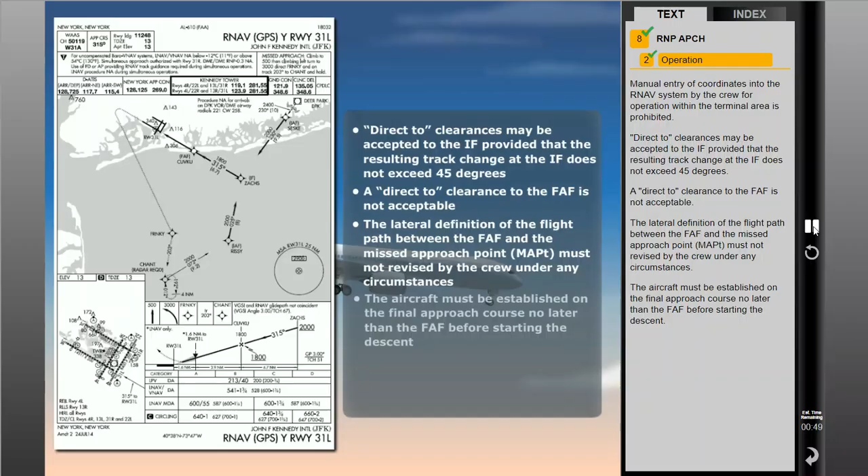The lateral definition of the flight path between the FAF and the missed approach point must not be revised by the crew under any circumstances. The aircraft must be established on the final approach course no later than the FAF before starting the descent.

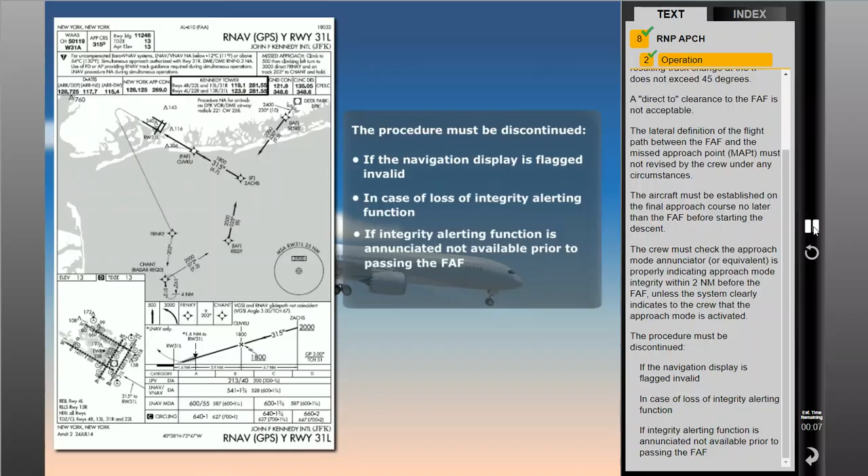The crew must check the approach mode annunciator or equivalent is properly indicating approach mode integrity within 2 nautical miles before the FAF, unless the system clearly indicates to the crew that the approach mode is activated. The procedure must be discontinued if the navigation display is flagged invalid, in case of loss of integrity alerting function, if integrity alerting function is annunciated not available prior to passing the FAF, or if FTE is excessive.

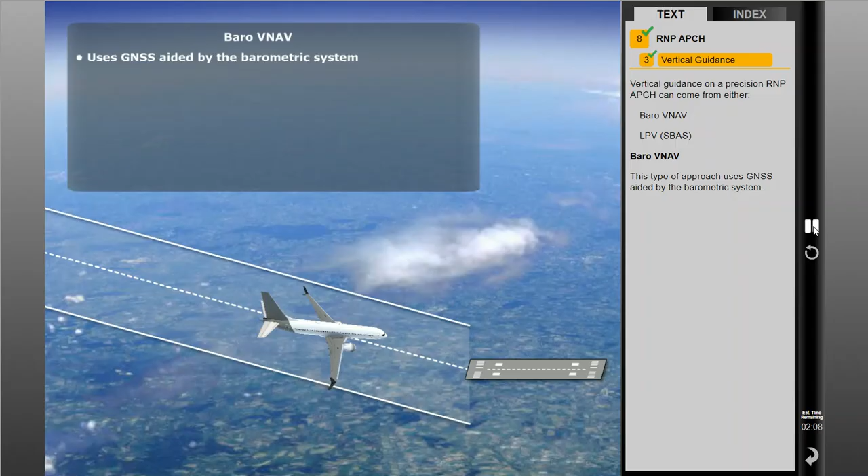Vertical guidance on a precision RNP approach can come from either barometric or baro VNAV, or localizer performance with vertical guidance, or LPV, which is a satellite-based augmentation system. A baro VNAV type of approach uses GNSS aided by the barometric system. The vertical guidance supplied by the baro VNAV system must be certified for this purpose.

This 3D approach requires the current altimeter setting of the landing airport. Remote altimeter settings are prohibited. Additionally, flight crews should be familiar with the pronounced effect of non-standard temperature on baro VNAV operations. Temperature limitations published on RNP approach procedures need to be complied with, unless the avionics system has temperature compensation capabilities.

When baro VNAV is used for guidance during the final approach segment, deviations above and below path must not exceed plus 30 meters and minus 15 meters, or plus 100 feet and minus 50 feet. Pilots must execute a missed approach if the lateral deviation exceeds 1 time the RNP, or the vertical deviation exceeds 22 meters or 75 feet, unless the pilot has the visual references required to continue the approach.

LPV is a 3D operation utilizing the GNSS for both lateral and vertical guidance. Pilots fly to a decision altitude along an angular guidance, which increases in sensitivity as the aircraft gets closer to the runway. An RNP approach to LPV minima requires use of a Final Approach Segment, or FAS, data block.

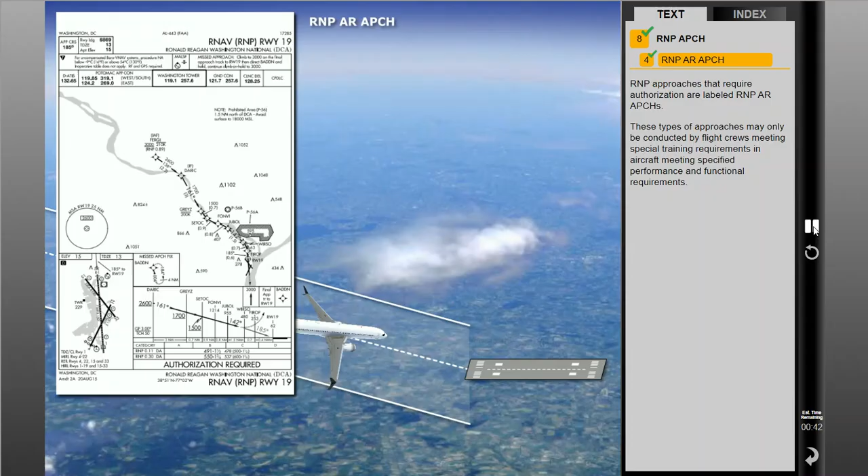RNP approaches that require authorization are labeled RNP AR approaches. These types of approaches may only be conducted by flight crews meeting special training requirements in aircraft meeting specified performance and functional requirements. For RNP AR approach procedures, curved routes between the FAP and the runway are possible.

All aircraft must have a cross-track navigation error no greater than the applicable accuracy value of 0.1 nautical mile to 0.3 nautical mile for 95% of the flight time. The along-track positioning error is also held to this standard. Missed approach RNP values can be less than 1. Minima DA/DH can be as low as 250 feet.

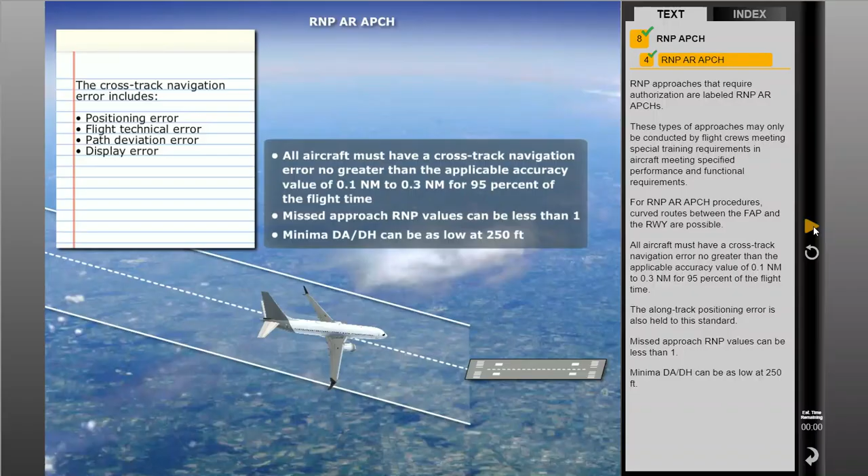Advanced RNP, or ARNP, enables more accurate and predictable flight paths for enhanced safety and efficiency. It is used to operate in the en route, terminal, approach, and departure phases of flight. ARNP incorporates the navigation specifications RNAV5, RNAV2, RNAV1, RNP2, RNP1, and RNP approach, and requires RNP capability. ARNP may be associated with other functional elements.

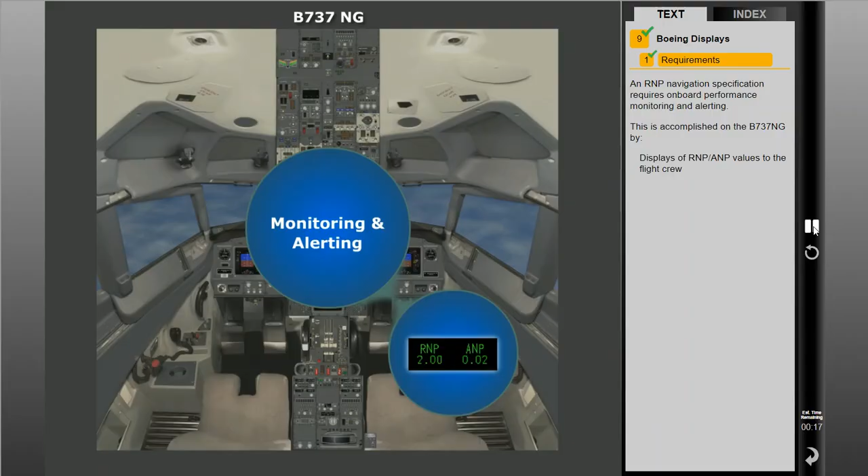An RNP navigation specification requires onboard performance monitoring and alerting. This is accomplished on the B737NG by displays of RNP and ANP values to the flight crew, lateral and vertical navigation performance scales on the PFDs, NAV performance scale alerting, and FMC alert messages.

Current lateral RNP and ANP values are displayed in numerical form on the FMC legs page. Current lateral and vertical RNP ANP values are displayed in numerical form on the FMC progress page. Current lateral and vertical RNP ANP values are displayed in numerical form on the NAV display, or ND.

Lateral and vertical NAV performance scales are located on each PFD to provide additional displays of RNP and ANP values. The symbology on both the lateral and vertical scales are identical. The hollow center white index represents the aircraft position. The solid white end scale symbols represent the current RNP value.

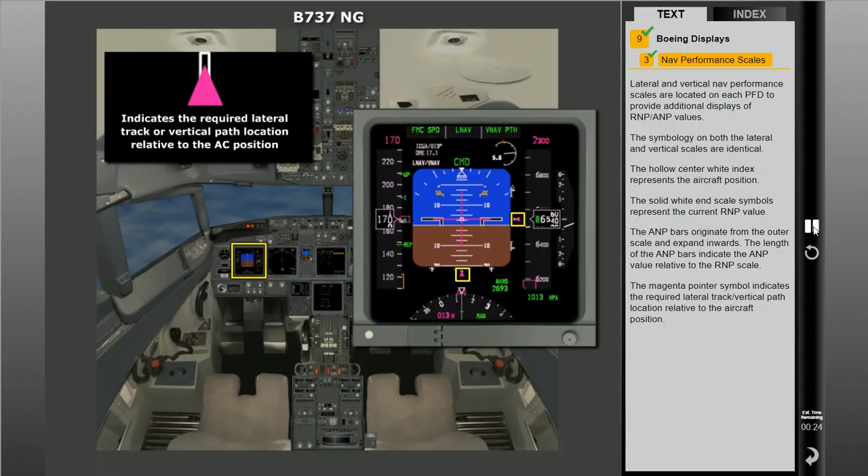The ANP bars originate from the outer scale and expand inwards. The length of the ANP bars indicate the ANP value relative to the RNP scale. The magenta pointer symbol indicates the required lateral track or vertical path location relative to the aircraft position. If flight technical error occurs, the magenta pointer will move away from the center aircraft position index. Acceptable NAV accuracy is maintained as long as the magenta pointer does not reach the inside end of the ANP bar.

If flight technical error is so large that the magenta triangle moves into the ANP bar, acceptable NAV accuracy is no longer being maintained. After 10 seconds, the magenta pointer will flash and the ANP bars will turn amber. If the flight technical error exceeds the RNP value, the magenta pointer turns hollow and parks outside of the RNP end scale marks. If ANP increases due to degradation of NAV input signals or onboard equipment failures, the ANP bars may merge in the center of the NAV performance scale. Merged ANP bars will also turn amber.

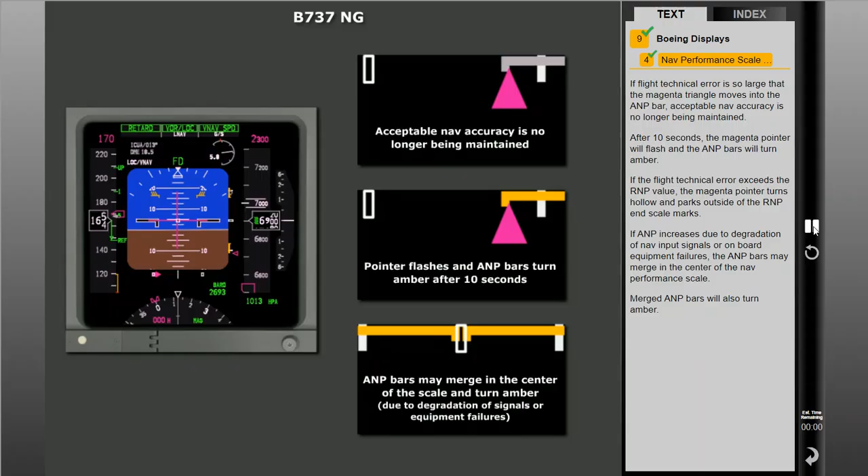The FMC provides various alerts to the flight crew for navigation performance monitoring. If ANP grows to the RNP value or greater, the FMC alerting message, Unable NAV Performance RNP, will appear in the CDU scratchpad. If a manually entered RNP value is greater than the FMC default RNP value, the alert message, Verify RNP, appears. When the navigation performance scales are enabled and the manually entered vertical RNP is greater than the default vertical RNP value, or the manually entered vertical RNP is greater than the current vertical ANP value, the alert message, Verify Vertical RNP Value, appears.

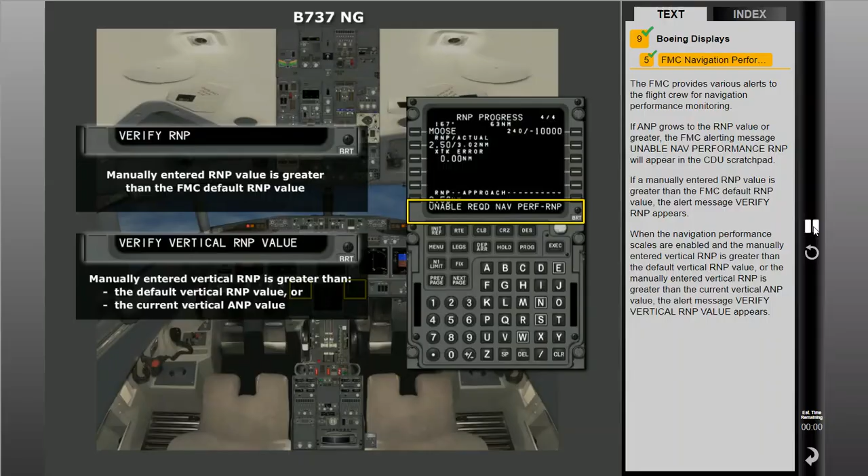Onboard performance and alerting in the Airbus is different from that in the Boeing aircraft. Displays on the A320 include required and estimated navigation performance, level of accuracy, lateral and vertical navigation performance scales on the PFDs, and FMC alert messages.

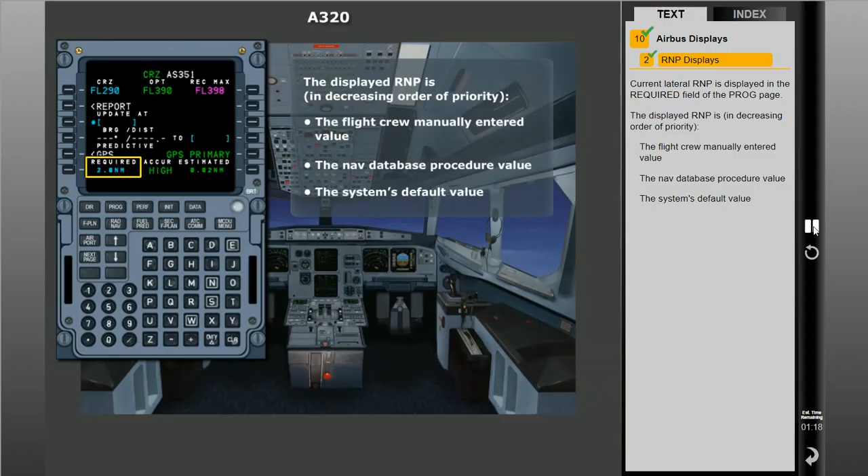Current lateral RNP is displayed in the required field of the progress page. The displayed RNP is, in decreasing order of priority, the flight crew manually entered value, the NAV database procedure value, or the system's default value. The display also shows the estimated position uncertainty, or EPU, what Boeing calls ANP. Accuracy is displayed between the two as high if the EPU does not exceed the RNP, or low if the EPU exceeds the RNP.

When in IRS GPS mode, the GPS primary status combines two different criteria: the accuracy criterion already described, whether high or low, and an integrity criterion, which is the capability to detect a failure and provide appropriate warning of it. When both criteria are met, GPS primary displays in green on the progress page and temporarily on the ND. If both criteria are not met, the GPS primary is removed from the progress page and alerts are displayed. It is possible to clear the scratchpad message on the MCDU, but not on the ND.

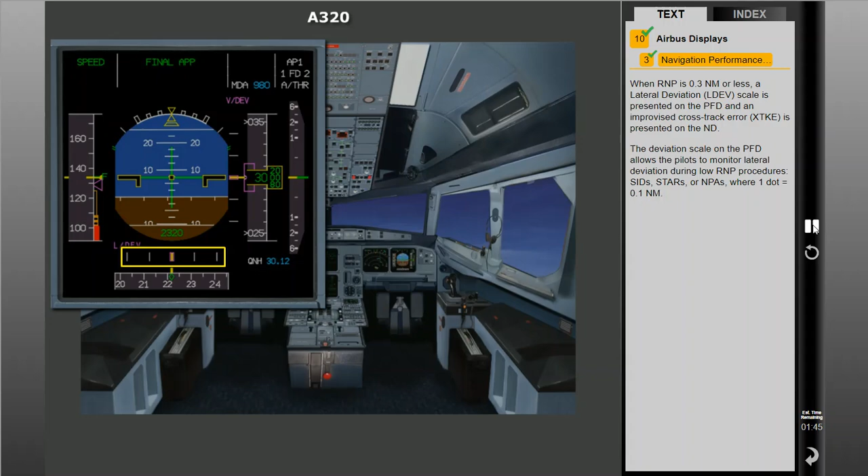When RNP is 0.3 nautical miles or less, a lateral deviation scale is presented on the PFD, and an improvised cross-track error is presented on the ND. The deviation scale on the PFD allows the pilots to monitor lateral deviation during low RNP procedures, SIDS, STARS, or NPAs, where 1 dot equals 0.1 nautical miles. The index will be either green or magenta, depending on standard. If the LS push button is pressed, lateral deviation displays in amber and no deviation is displayed.

The LAT deviation scale is not displayed if a hold, a PI leg, an FM leg, or a DF leg is active, when the lateral deviation information provides a misleading indication of the direction to be followed to come onto the active flight plan, or in the done phase.

When on an RNP approach and the approach push button is pressed on the FCU, the vertical deviation scale is displayed on the PFD. This should be done prior to the vertical interception point, or VIP, and on the vertical flight plan. At the VIP, a blue arrow on the ND indicates that final approach engagement conditions are met.

The ND displays the cross-track with 2 digits after the dot when the aircraft is below the transition altitude and cross-track is greater than or equal to 0.02 and less than or equal to 0.29.